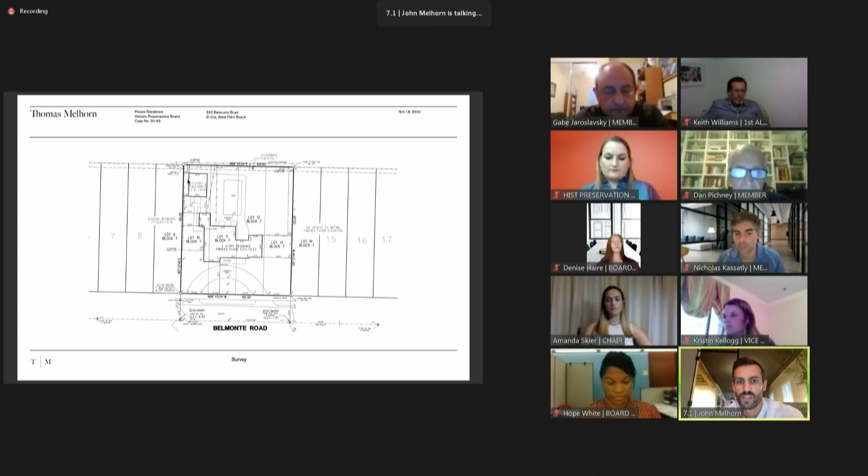This project is an ad valorem application. It is a renovation to an existing Monterey style structure on Belmonte Road. This is an existing survey of the lot. It shows the existing home, the pool in the backyard, which has actually been demolished, and then a non-contributing one-story accessory structure in the back.

This is the front facade. You can see here the brick first floor story, and then the second floor is wood clad and has a very low, slope pitched asphalt shake roof. This would be moving around to the right, so this is the east facade, and you can see a picture of the back and the accessory structure. And this is the rear of the house.

So here's the main house. The accessory structure would be off to the side, not pictured. And this is a laundry room addition that we'll talk about. Continuing moving around this house is the west facade. This is that laundry room addition. This is a side door, and then you can kind of see a bit of the street there. And this is a photograph of the accessory structure.

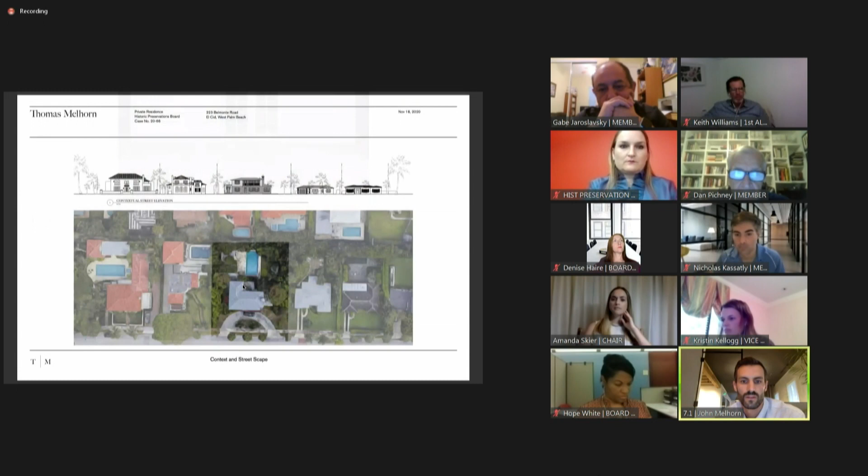This is the streetscape and context plan, so it shows how the house fits into the neighborhood. You may have seen on the survey, it's multiple parcels put together, so it's a rather nice sized lot. But this specific context zoning regulation for this area is rather restrictive compared to some other areas, which is nice. It's going to keep the openness of this lot, which is really part of the character of the street particularly. You can see as it moves from these low one-story ranch homes, it steps up to a few taller Mediterranean-style houses as you get closer to Olive.

This is the proposed plan that we have here. We are proposing to eliminate the circle drive in the front. I will say quickly, one of the things that Frederic mentioned is these both need to be 10 feet, and we have a landscape architect who will be providing a full plan addressing that. But for the most part, we are keeping the existing footprint of the main house, and the majority of the addition is happening at the rear of the house.

So we're adding on to the back here, as well as extending this a bit. And then we are removing the laundry room addition and adding a new laundry room that's up to grade with this. And then in the back, we'll be reconstructing this accessory building as a 2-story structure.

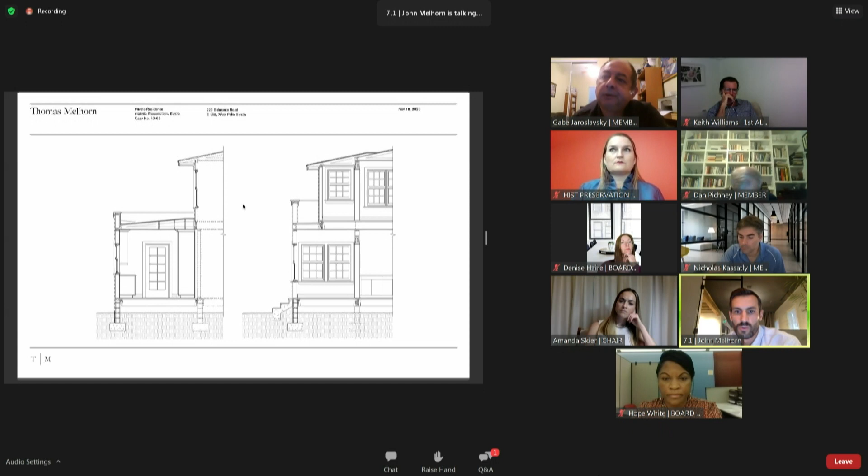One other thing I'll touch on from my consult with Frederica: she mentioned we had chosen to use windows that match the existing window type in our replacement on the sunroom, and recommended that we differentiate it. So this is an alternate proposal I wanted to have ready, using a casement type window instead of a double hung window.

And here's a colored rendering we put together as well. That concludes my presentation.

Okay, thank you. Questions of the applicant?

Yes, so you understand that there are 4 conditions for the approval of a project, right? Did you review them and agree with them, or not? I did, so I can run you through those.

Like I said, the first condition was the 10-foot maximum or 20-foot combined for the front entry drive. That's not a problem, we can address that.

This front window condition is the other one that Frederic had discussed, and this would be what I would put forward as our proposal. The third condition was that we keep the existing windows on this front facade, which I don't think we have a problem with at this time. So we'll restore those windows.

And then the fourth condition was that she had asked that we think about moving this door to the west facade instead of it being front facing. I also don't think that's a problem. If you'll humor me for a second, I'll go back up to the site plan and talk about that.

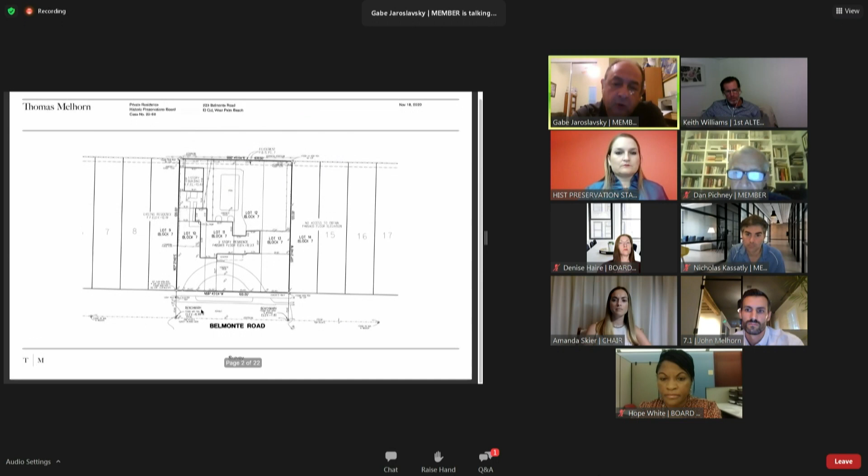Yes, so this second floor balcony — I mean, we'll be, I don't know — we would be saving this balcony, so the extent to which it projects out, the size, the members, everything we would restore or save, best we can. The lower balcony comes out, and we would be adding projecting outlookers underneath of this.

So the brick stays, the shutters stay, we'd be painting a different color. The elements coming off would be the deck, the steps, these 4 post columns, and also this door surround, because we won't be able to get the outlookers we want here without that. But the roof lines stay, and all that — the exterior walls remain where they are.

Any further questions of the applicant? I have a couple questions. The front door — I know it's not very Monterey to have that type of detail or pediment above it, but maybe moving the door off the laundry room area to the side will help. It seemed a little nondescript for the front of the house. I'm not sure if there's something.

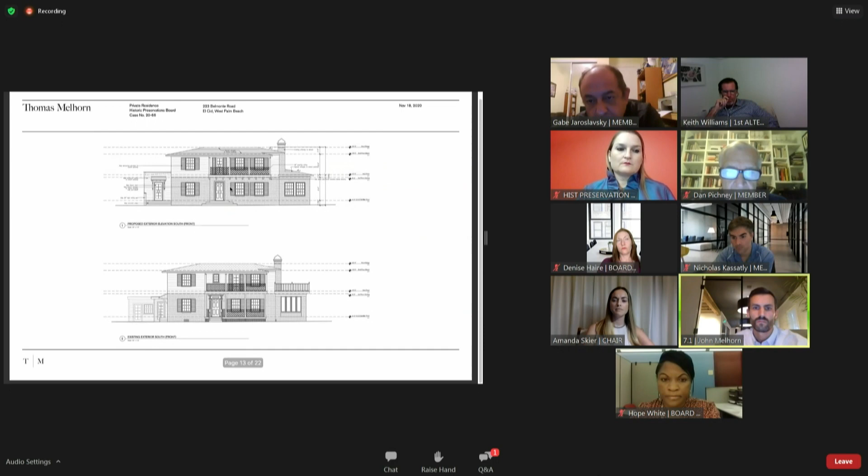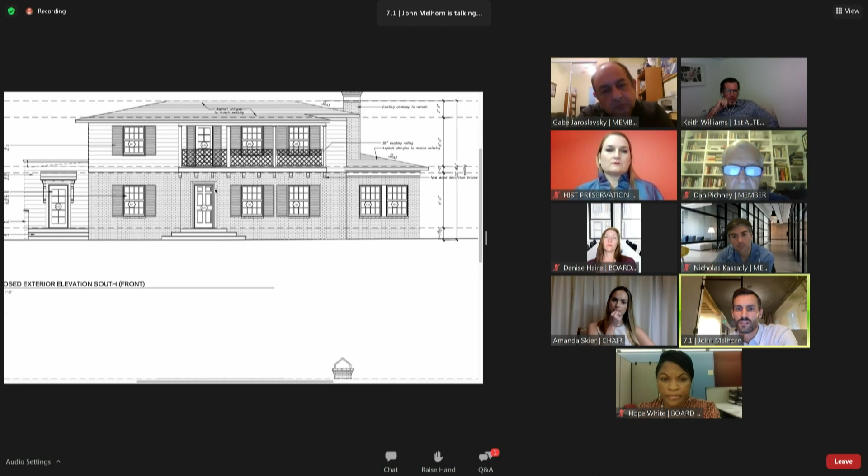Yeah, go to the elevations here. We would like to — so you can see the difference here, right? This is the existing porch with — you're right, Keith, we keyed in on that as well. This is definitely more of a federal colonial treatment than you'd see on a Monterey. Maybe we can look at this detail a bit more, but we'd certainly like it to be some kind of profiled stucco surround that accentuates it. I think that simple detailing is something you see in the Monterey style. Yeah, I see it here, I just didn't see it in the rendering, but I see it there.

And then you guys chose not to wrap the back of the house in brick, just run the clapboard all the way down? Yeah, so again I'll spin around the back here. Part of the reason is because this is the original, and since we're moving north we're coming outboard of that. We wanted to differentiate the fact that this was a new addition versus trying to completely conceal it or match it too closely.

Got it, and I'm sorry, one more thing — did you talk about the roof and the material? We're going to come back with the asphalt shake, like what's there now.

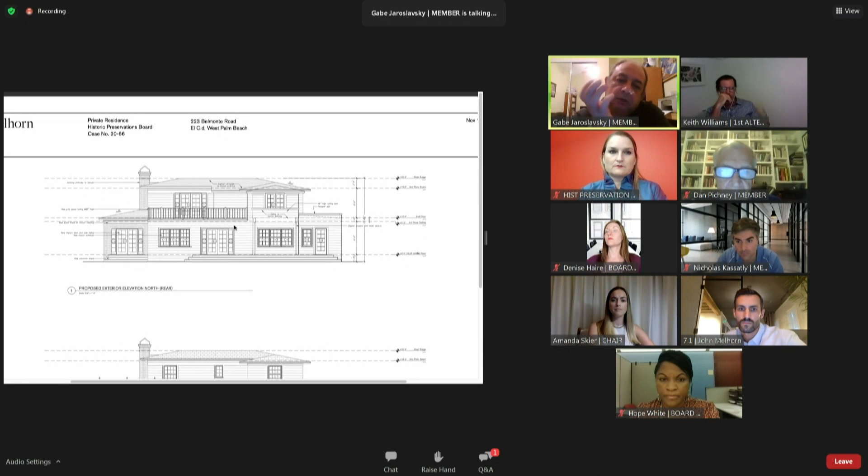Thank you. One more question. Can you explain why the decision, besides the fact that I understand that the master bedroom has the door now on the north side, but why changing the location of the terrace, if the terrace was original to the house?

Are you talking about the front? I'm sorry, the down below. So if you go to, so you see the terrace on the left, on the right, the terrace on the right hand side. Yeah, no, I know. Oh, on this one. Yeah.

I didn't see a lot of examples of that kind of rail. I would say it was truly made on an aesthetic choice. It wasn't anything that I had a historical precedent for. I wish I had some other pictures of the houses on this street, because all of them kind of have that low pitched roof. For the lower elements, you have the main body of the house, and then you have the wings, and they all have these lower pitched roofs. And I had not seen any examples either locally or through precedent that had something like that.

Okay, thank you. Any further questions of the applicant? Yes, I have a question.

The brackets underneath the second floor balcony, are those decorative or are they load bearing? Both. They're both. I can zoom in on it for you. I only say decorative because they will be like a profiled outlooker, and they're large. I think they're actually 5x9, so they're quite substantial.

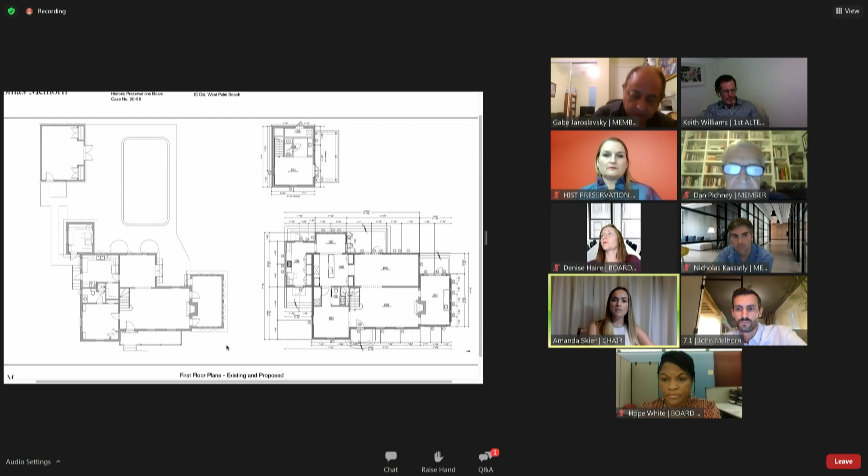Any further questions of the applicant? Mr. Melhorn, I have some concerns about that door surround. You've studied the other houses on the street. Yeah, we looked at them. So 210 Belmont has a very similar door surround, and the outriggers are actually touching the top of it. That leads me to believe that this is likely an original feature, and it is a form of colonial style architecture. So I think that while it may be perhaps more ornate than what might be seen on other Montereys, the fact that there's a home directly across the street that was likely developed at the very same time has a very similar feature gives me pause about the removal of that feature.

Yeah, I don't disagree with you. I know exactly the house you're talking about. It's kind of a yellow colored house with the black shutters. I spoke to Frederick about it as well in our consult, that I was aware that could potentially be an issue. I don't have a problem necessarily with looking at it and modifying it and seeing if we can reuse it.

Okay, so you would be amenable if that was a condition of approval? Yeah, I'd like it. Is it possibly something that I can leave up to Frederick as a staff approval, staff review type thing, instead of it being wholly redesigned? I would just like the opportunity to study that a little bit more in depth. In what way? Redesigning it rather than retaining the original, or what do you mean by that?

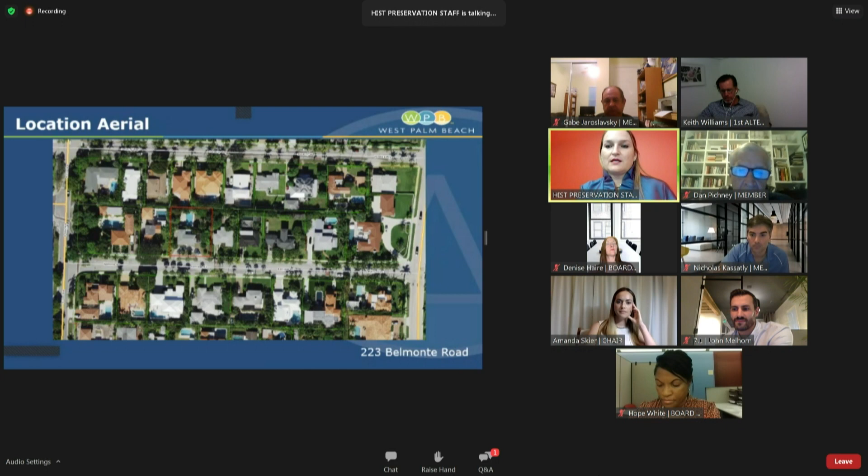Yep, great. So Frederick Mittner presenting also for 223 Belmonte Road. As was noted, it is a contributing structure in the El Cid Historic District on the north side of Belmont, between South Olive Avenue and Flagler Drive. It was built in 1940 by Burnup and Sims.

This is a current photo of the house, zoomed in specifically looking at the detail of the door surround that was just mentioned. That was something we discussed on the phone, and the applicant was going to see if they could find evidence whether it existed or not. One suggestion is perhaps this component could be lowered a bit to still retain the side elements, just a suggestion as the board explores how to address the surround with the applicant.

This is the context of the house, and Belmont in general has a lot of Monterey styles. The request this evening is for two parts: the accessory structure, which is the demolition of the existing one-story accessory in the northwest corner, and construction of an approximately 837 square foot two-story structure in more or less the same location, meeting the required setbacks of 5 feet off the rear and 5 feet off the side.

For the primary structure, there is going to be some selective demolition of the rear kitchen, dining, and laundry room, and demolition of the front porch. I have also been told by residents of the neighborhood that it had just a cantilevered balcony in the traditional Monterey style, not the porch we see now.

At one point I did have access to a photo. Unfortunately I could not locate that again, but I have seen an image where it was just the balcony.

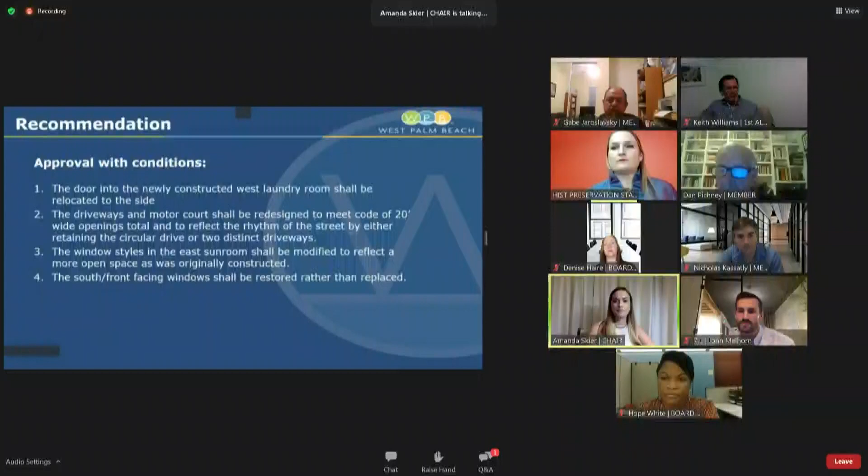Mr. Mittner? Yes, I have two questions. First of all, because there's a demolition, will that require two motions? For an accessory structure, we traditionally have not done that as a separate motion. Okay, but I'll leave that to the board attorney.

Okay, and secondly, the conditions called for the preservation, or restoration, of the windows on the south-facing portion of the structure. That packet you sent us had a listing of the conditions of all the windows, and they recommended, if I recall correctly, that all of them be replaced. Yet with the photographs I saw, there didn't seem to be significant damage to the windows. There were places where the paint was peeling, I guess due to condensation collecting below the muntins and so forth. So my question is, did you find any reason to preserve any of the other windows on the other sides of the house?

Well, of course, it would always be ideal that all windows are preserved. However, the policy the board has adopted and staff has been working with is that we restore front-facing windows where they're visible from the public right of way. We felt that was a good compromise where you get the impact protection and some of the other possible benefits of a new window in terms of insulation and noise. But again, it's not visible from the street, so we thought this was an appropriate compromise.

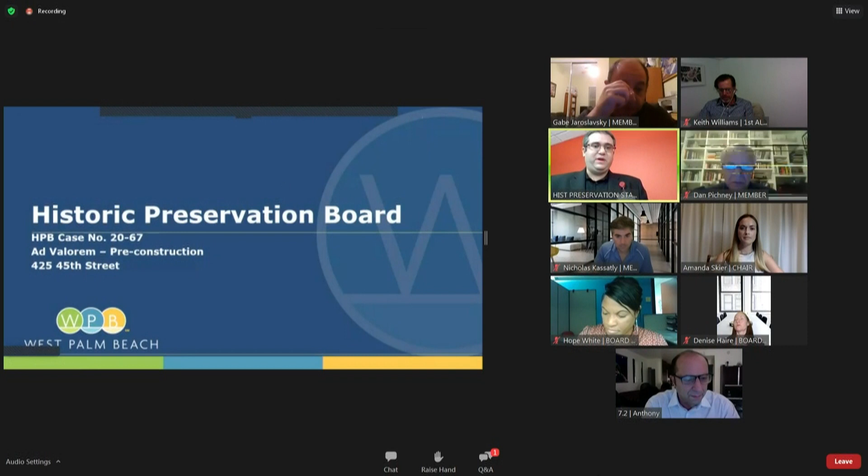All right, Aaron Borgover, Historic Preservation Planner. Here is case number 20-67 for an Ad Valorem pre-construction application for 425 45th Street. Here we have the location highlighted in red right here. There is a proposed about 421 square foot addition to the rear of the existing 946 square foot house, replacing all existing windows and doors with impact to match existing. Replace the existing garage door with an impact garage door with an increased height of 18 inches. And interior site work. 425 45th Street is a contributing structure within the Northwood Harbor Historic District.

On the left, we have the property immediately to the west, and on the right, we have the property immediately to the east. This is a photo of the property in question from the street. And here's just a close-up photo of the front elevation, including the garage door that currently exists, as well as the wood windows that are on the front elevation.

So a bit of the site history. Permit was actually pulled in 1939 and was granted for Marian Warr for $3,000. In the middle here, we have the Sanborn map, which was republished in 1952, illustrating the footprint of the house, as well as what is currently the garage. And on the right, we have the property record card from 1962, which illustrates the garage, as well as the property's current configuration as footprints.

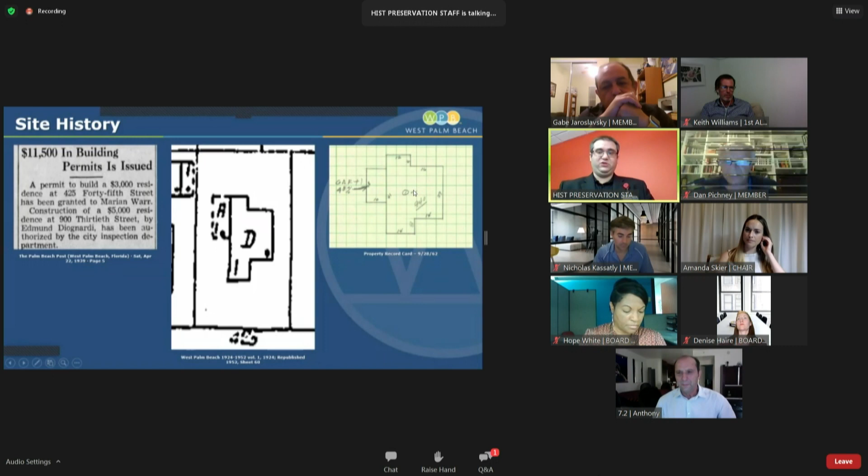Here we have the survey and the site plan on the right, and the addition is in the rear of the property. Here we have the existing floor plan on the left, and on the right the proposed floor plan, which has the master suite and dining room. This is the proposed elevation for the north elevation.

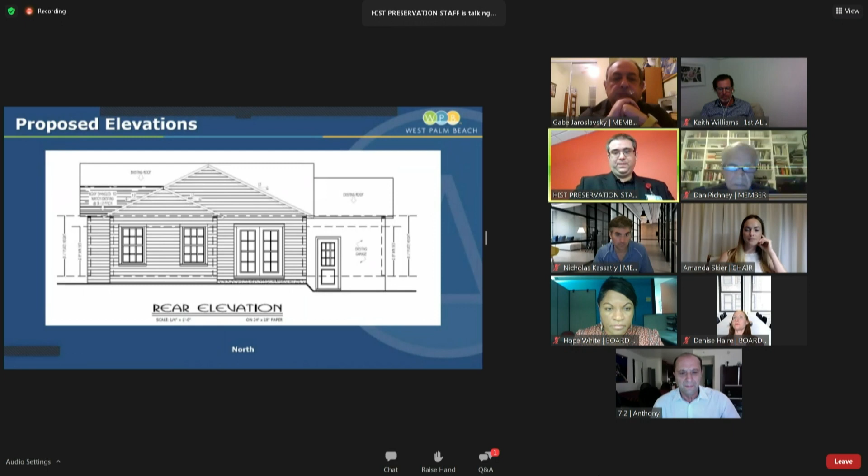So there's a paired French door, 2 6/6 windows. There will be a double face on the gable. And here we have the east elevation, which will have a 6/6 window as well as the gable that extends north, as well as siding to match the existing.

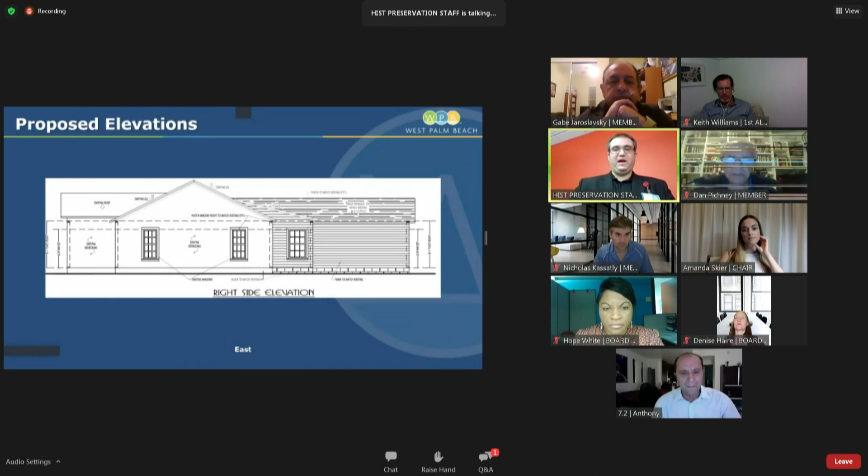So staff has reviewed the criteria for additions and alterations, and it complies with the Historic Preservation Ordinance as well as the Secretary of Interior Standards number 9 and 10. And staff is recommending approval of the pre-construction application with these 5 conditions.

The front street-facing window plus the window immediately adjacent to the front door shall be retained and restored. However, if the applicant can provide at least 2 letters from a licensed restoration company stating that the existing front windows are damaged beyond repair, staff can review and authorize the replacement of these windows with similar windows for the rest of the project. Second, all windows shall be sized to fit the original window opening frame and match the placement/depth of the original windows within the frame opening.

Third, the existing wood sashes shall be recycled, donated, or stored on site to preserve an irreplaceable historic resource. Fourth, all non-street facing glass shall have clear glass only or clear glass with low E coating, and all street facing glass shall have clear glass only. Lastly, the fifth condition, siding on the addition shall match the existing siding and material or shall be HardieBoard, Boral, TruExterior, or other similar product. Thank you.

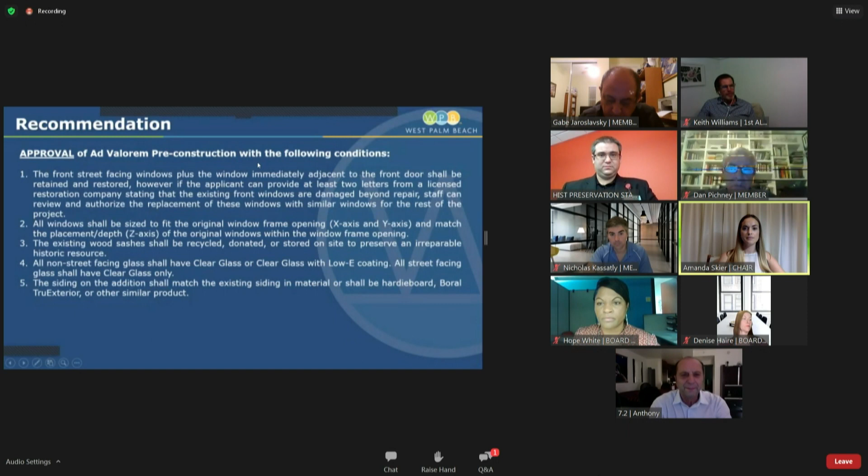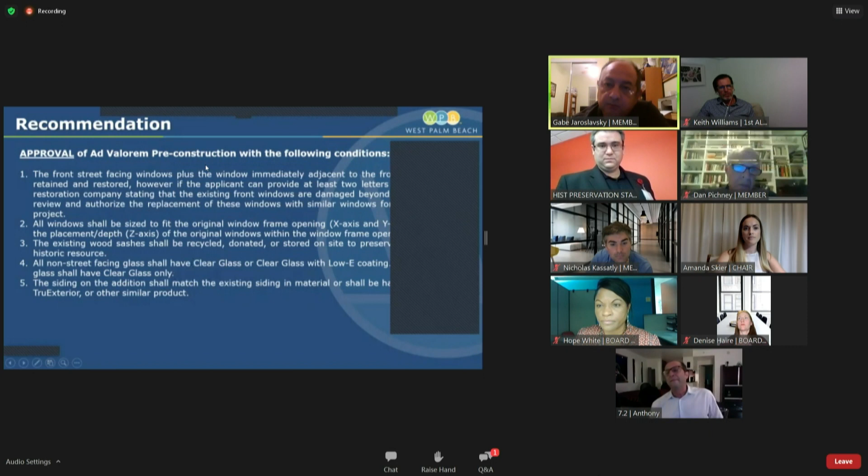I was wondering, Aaron, if you can go to the floor plan for the addition. I'm not really sure because probably what I was going to propose doesn't make any sense at this location and may change the design of the roof. But should we break the addition with the existing exterior wall? So because they are adding to the existing wall, should we break it there to differentiate what is existing with what is new? That is one way of taking this approach.

However, they could use a different material such as Boral TruExterior, or hardieboard and accomplish the differentiation with a different material on the outside, which they did. The application doesn't specify the material. It does say match existing, but it wasn't clear if that was for material or profile.

Okay, thank you. You're welcome. Any further questions of staff? Do we have any public comment on this case? I did not receive any. Madam Chair, there's no one indicating public comment, no. Okay, we'll go into executive session then.

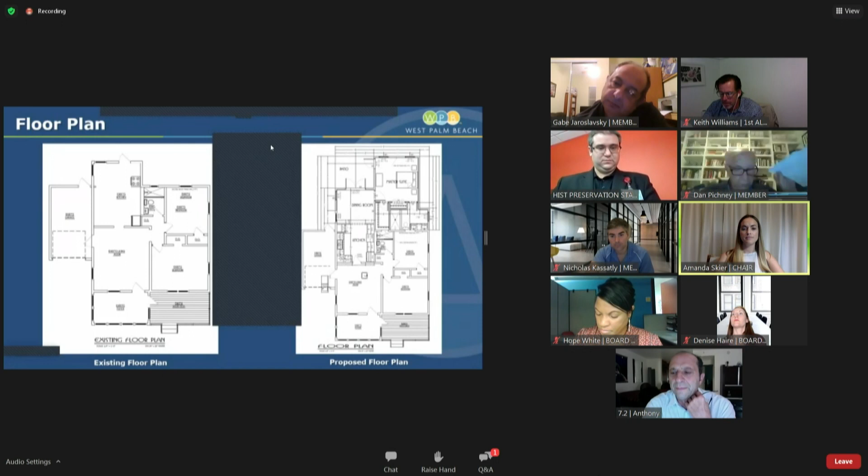It seems that the owner is amenable to the conditions. It will certainly help adapt the property for a more modern lifestyle. I agree. Unless there's any further discussion, would someone like to make a motion?

I can make a motion. I move that the Historic Preservation Board approve application number 20-67 for ad valorem pre-construction in accordance with standards 9 and 10 as set forth in section 94-49 of the City Zoning and Land Development Regulations. The motion is based on the testimony presented along with the application submitted and the staff report, which constitute competent substantial evidence. In addition, the approval of this request is made conditional upon the following restrictions, stipulations, and/or safeguards that I move are necessary to ensure compliance with the purpose and intent of the Historic Preservation Ordinance, the historic preservation element of the comprehensive plan of the City of West Palm Beach, the Secretary of the Interior standards for rehabilitation, specifically standards 9 and 10.

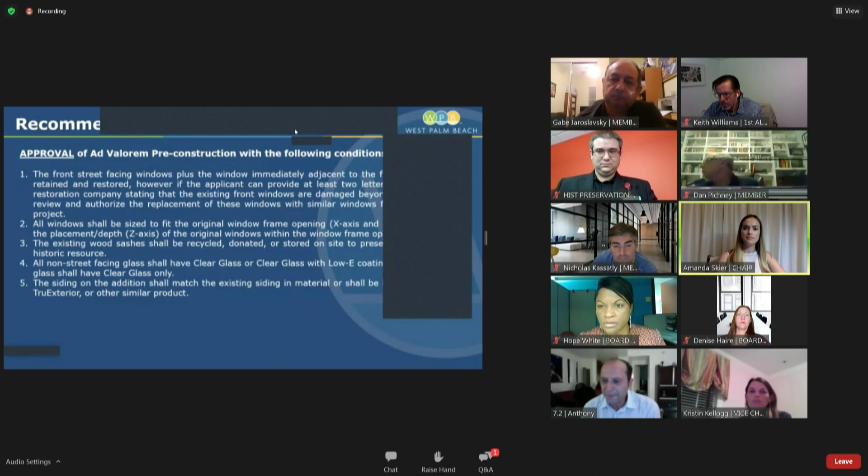Do we have a second? Second. All those in favor? Aye. Aye. Any opposed? Okay, motion carries. Your project is approved. Thank you. Thank you. Appreciate it. Thank you for the staff too.

Moving on to case number 20-70, 3320 Washington Road. I think Chuck Millar has a presentation for that.

Chuck, you'll just need to turn on video and audio. Yep, I'm good. Can you hear me? We cannot see you, give me one second and I'll fix that. How's that? Great. Raise your right hand. Do you solemnly swear that the testimony you're about to give will be truthful? I do. Are you presenting, Mr. Kolins? We can't hear you, you're on mute. Oh, Mr. Millar will begin the presentation and I'll be here maybe to add a few words. Okay, could you raise your right hand please? I did. Go ahead, solemnly swear or affirm that the testimony you're about to give will be truthful. I do. Thank you.

Okay, please proceed with your presentation. Is it visual? Yes. All right, great. Thank you, I appreciate the opportunity to be here tonight. With myself and Ron, I've worked closely with staff. We appreciate the time and effort that they've put into this, as well as the board and all the other applications, especially ours. This is a request for 3320 Washington Road by the Curry family.

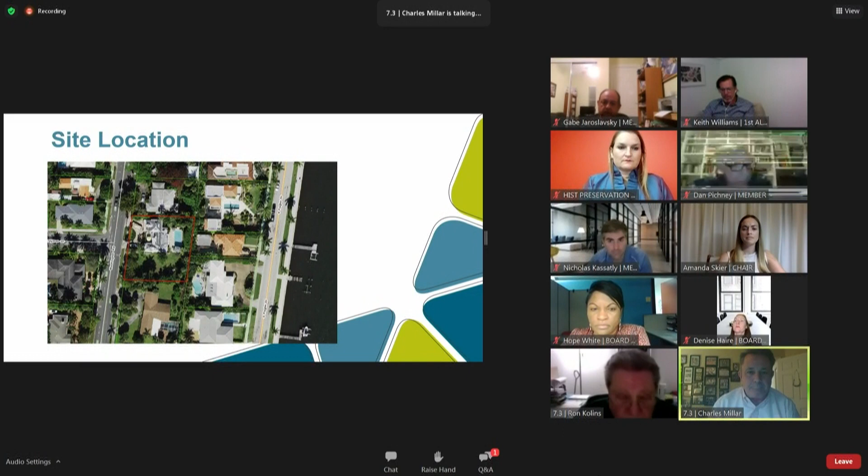This gives you a higher elevation aerial of the neighborhood and surrounding lots. I won't point them all out, but you can see visually that there are numerous lots throughout the neighborhood. What I've picked up here is essentially 4 blocks that have a 50-foot lot frontage based on the plat from 1924.

Again, it's a request for relief from section 9482, asking for 5 feet on the north, which is the minimum. There'll be 10 feet on the south, and a cumulative requirement of 20, so we're seeking a relief of 5 feet.

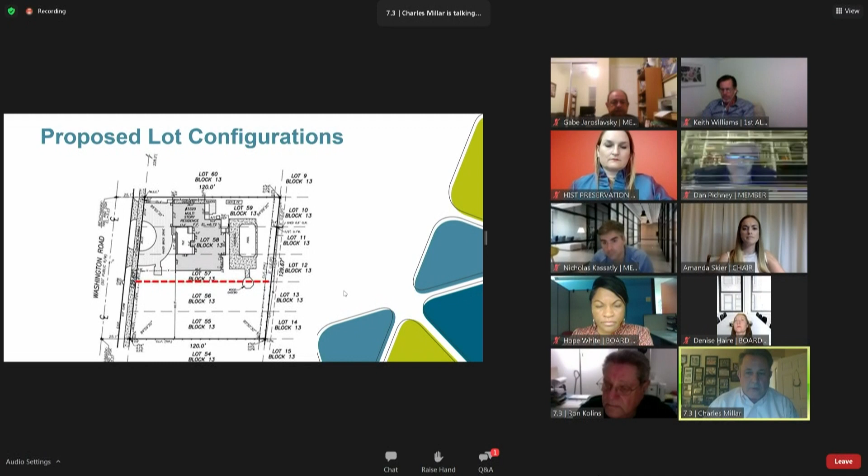So the south portion is approximately 10 feet, and the north portion is approximately 5 feet. So when this lot is created for future purposes, we need a waiver of 5 feet for the Curry property. The 2 lots combined on the south side will have to come in and comply with all minimum standards in the zoning district.

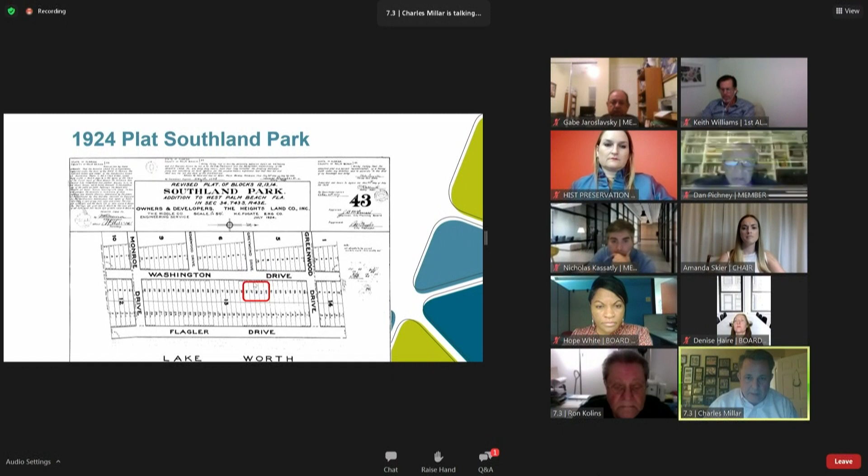A little bit of a street view. This is standing in the Curry property looking to the northeast, and this is looking directly to the east from Washington Road at the Curry property. The subject site is really behind the hedgerow.

I'm not going to read through these because we do have a staff recommendation of approval, but I did, at least for the record, want to establish compliance with the variance standards, which we meet all 10 of. I'm not going to read through these and take up your evening.

In summary and conclusion, the 5-foot variance is justified. It maintains the residential and historic preservation character of the neighborhood. It meets the intent and purpose of the zoning district by meeting the minimum 5-foot setback. The lot split will follow lot lines as platted from 1924. The massing and rhythm of the existing residential streetscape will continue to be maintained and preserved.

This fulfills and complies with the goals, policies, and objectives of the city's comprehensive plan. The application is similar in nature to like variance requests which have been granted throughout the neighborhood in the past. It allows for the reasonable and sensible use of both lots, complies with the residential development patterns within the existing neighborhood, and is a value-added residential improvement to the neighborhood. We do have staff's recommendation of approval.

We would urge the board to approve our request. We're here to answer any questions. Thanks to staff, and I will allow Frederique to make her presentation. So thank you.

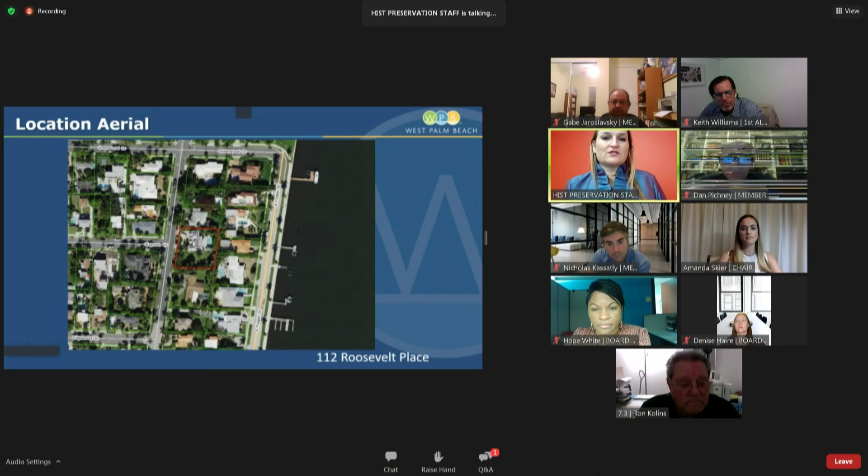A quick overview, similar to what you just saw presented. The cumulative side setback variance request under case 20-70 for 3320 Washington Road. The subject property is on the east side, located in the Prospect Park / Southland Park Historic District. The request is for a 5-foot cumulative side setback. 20 feet is required; they're proposing approximately 15 feet, 5 on one side, 10 on the other. They just don't add up to the 20 adopted under our building size, scale, and mass regulations.

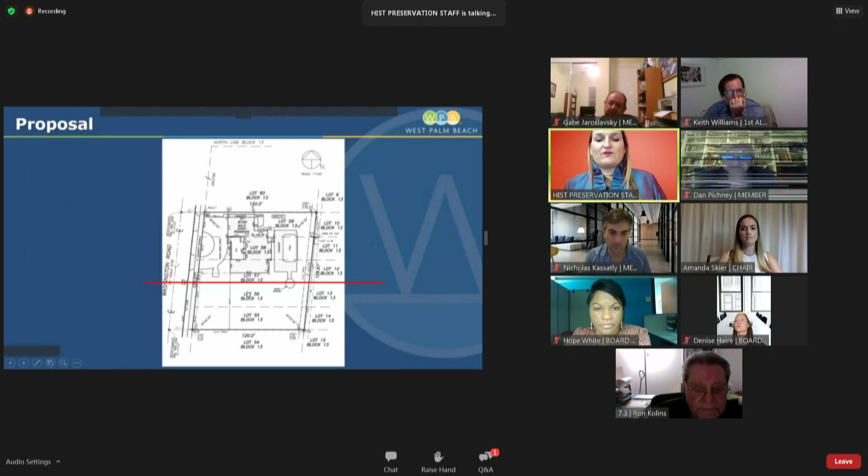As they've already indicated, it would be right along an original lot line, putting lots 55 and 56 together, and the existing structure would remain on lots 57, 58, and 59. This is how that translates into the aerial.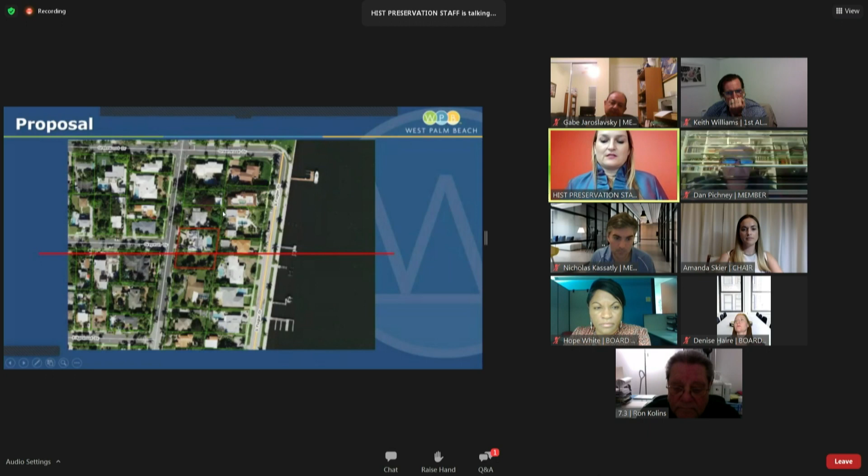The southern lot that would be created, currently vacant, has about 52 feet of frontage, similar to other lots in this area, including a few over on South Flagler Drive and Washington Road, and certainly a lot on the interior streets. This is the house that's currently there, and as you saw in the previous image, the vacant portion is behind this hedge.

Any new construction proposed in the future on this lot would of course require Historic Preservation Board approval. So again, another shot from the south, the neighboring property, and this would be a staff administrative lot split because it is on original platted lots.

So we are recommending approval because we do believe the petition meets the 10 variance standards found in section 94-38D6. These are included in your staff report, as well as have been covered by the applicant. We do believe it complies with all of these. I'm happy to answer any questions you may have.

Okay, thank you. Questions of staff?

Seems pretty straightforward. Do we have any public comment on this case? I did receive a few phone calls asking what the case was about, but did not have any additional feedback in the affirmative or negative, just curiosity. Madam Chair, there is no one online who has expressed a wish to comment.

Okay, thank you. So we'll go into executive session. As I said, it's pretty straightforward and no one seemed to have any questions. So would someone like to make a motion?

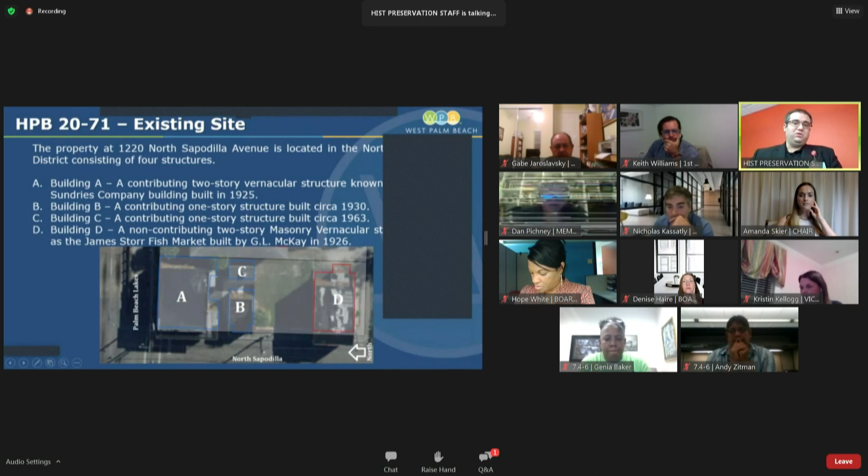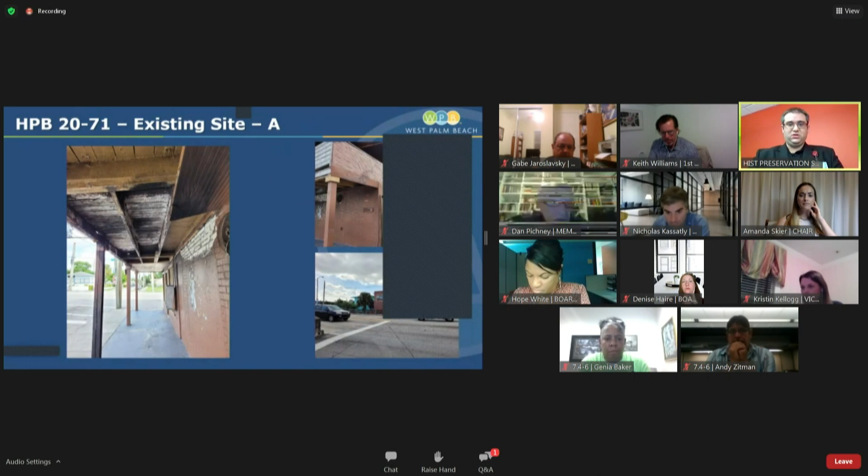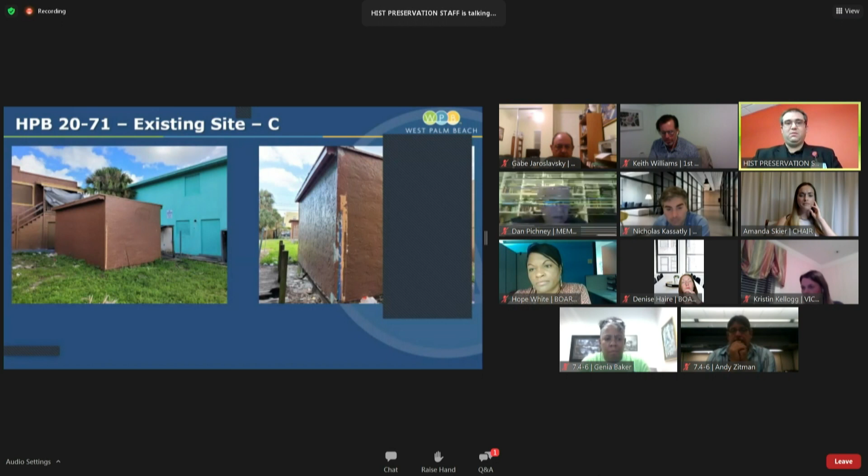The next few slides are just photos of the existing property. Here is building A, on the corner, illustrating its condition from the outside. Here is building B, the next street-facing building. Here is building C, located behind building B. And here is building D, on North Sapodilla, on the corner of the alley.

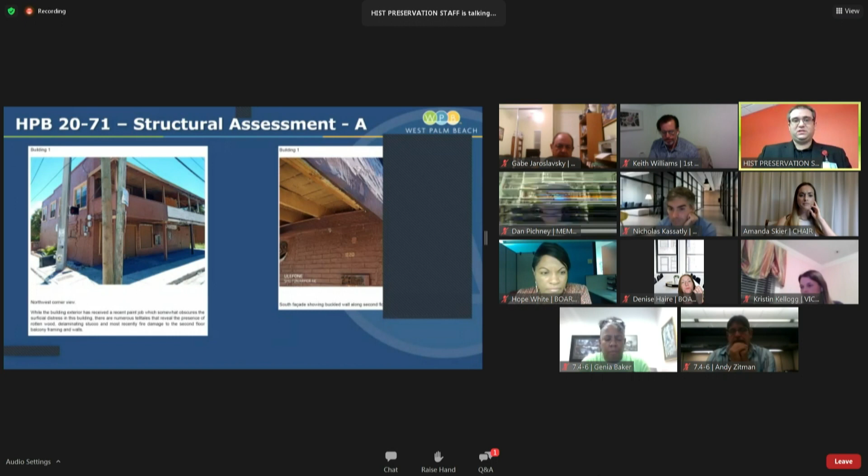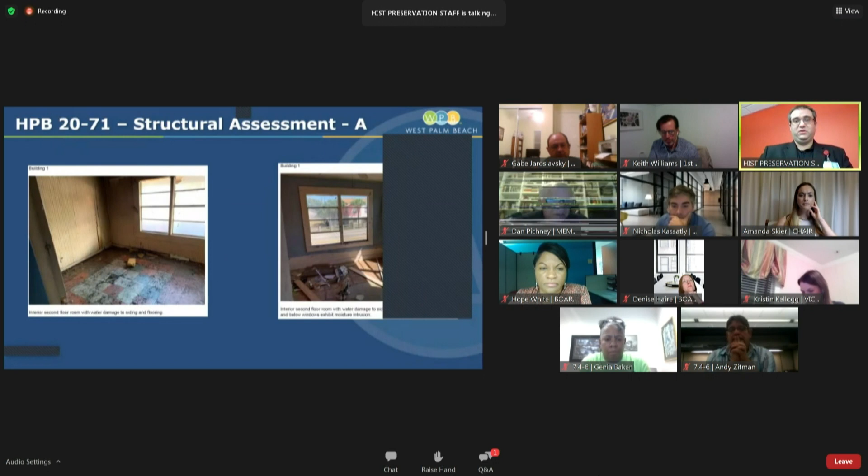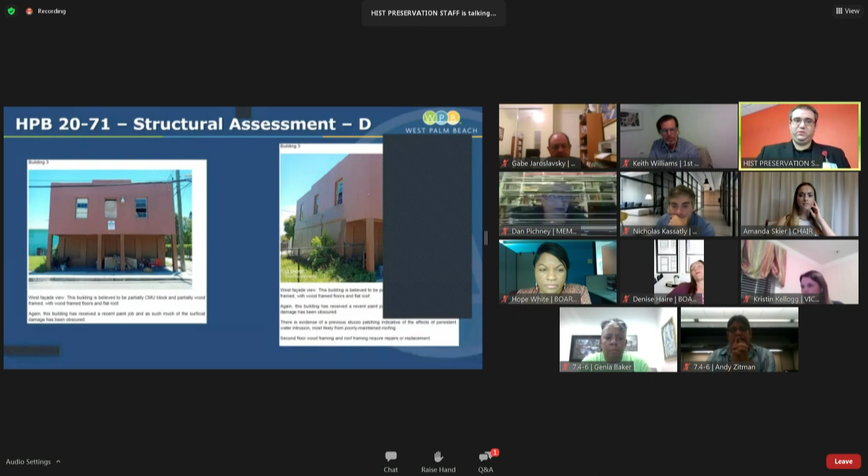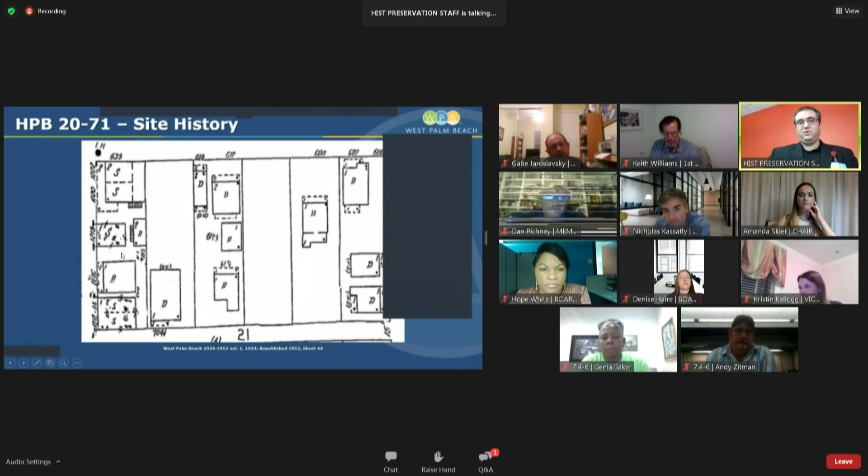A little about the site history here. This is the property in question. There was a number of buildings here, one of which has since been removed. Here is the property record card, which at one point listed a beauty salon, a barber shop, another beauty salon, as well as Pine Ridge Sundries.

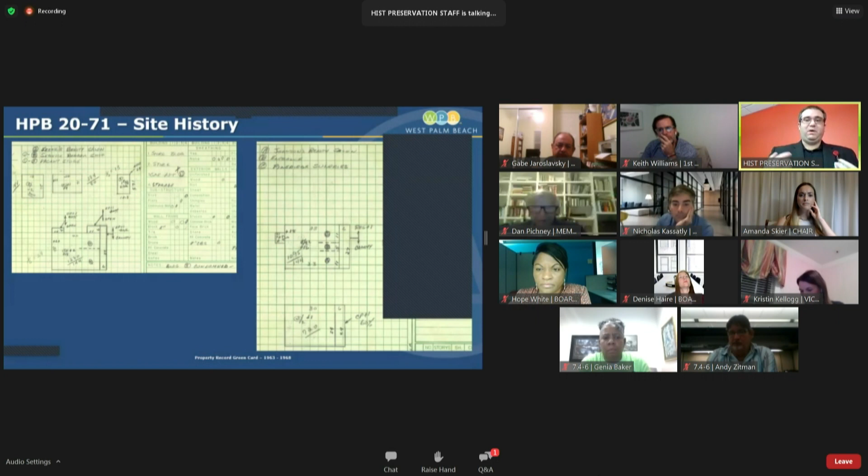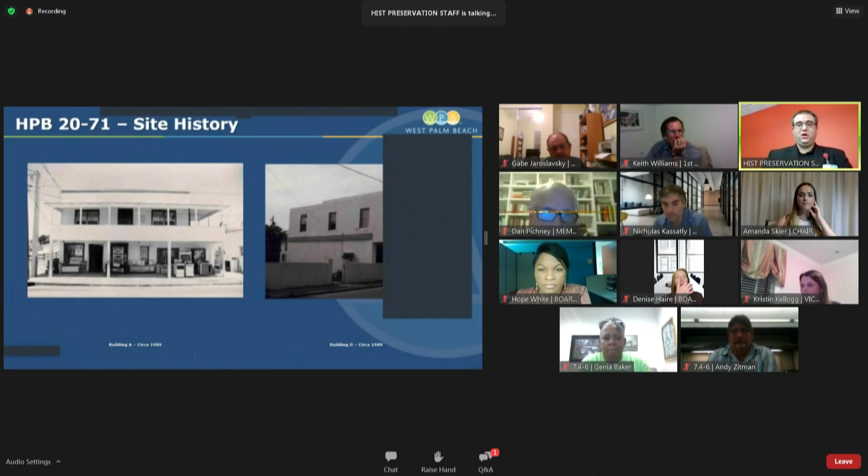A little bit about the individuals who owned this property at one point. This gentleman, S.M. Flewellen, either started or took over the business in the 1930s and ran it until he retired in 1971. When he retired, M.J. Adderley took over the business. I'm not sure when it closed down, didn't find that information, but Adderley worked at the store as a child, at age 9.

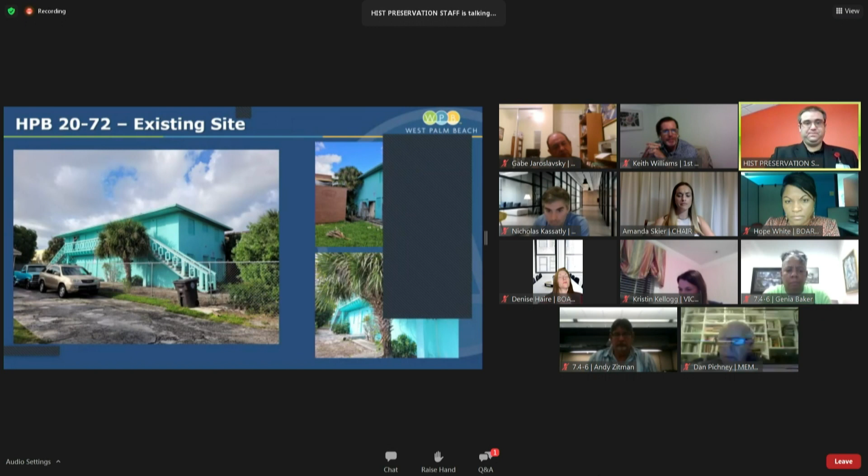Next is 2072, the demolition of a primary non-contributing two-story structure at 632 Palm Beach Lakes Boulevard. These are photos of the existing site from the exterior, illustrating the mid-century railing for the stairwell.

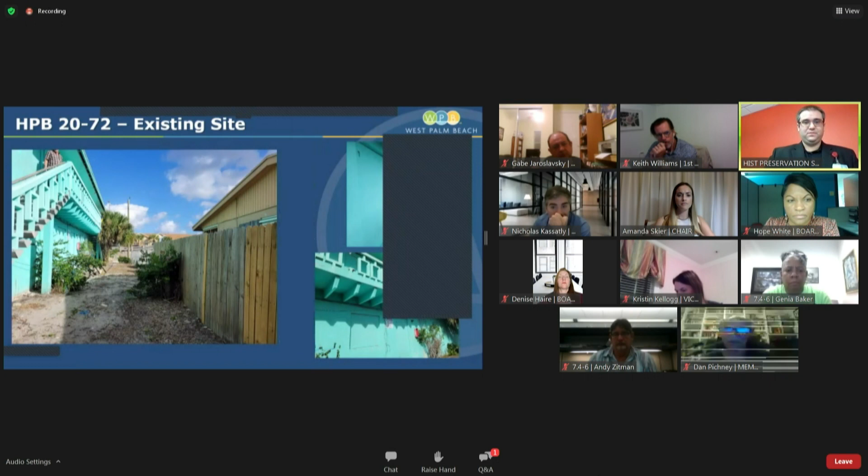A little bit about the site history here. Originally there was a one-story frame structure in the back that was demoed for parking. The contractor was Metzler and the architect was E.H. Gothenberg. On the right is a note from the property record card that the project was actually held up because of the 12th Street overpass when it was originally being built.

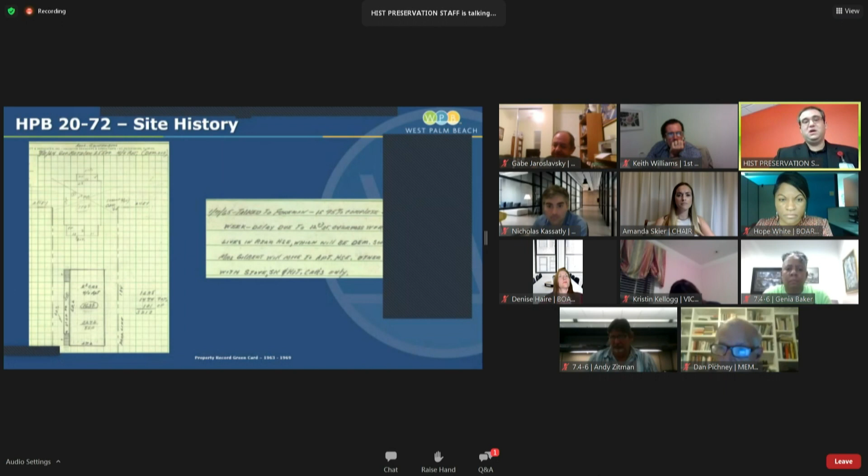A brief history about the architect: he was a native of Pennsylvania and a resident of Boynton Beach for 12 years, where he worked as the planning and inspection director. Unfortunately, after he passed away, there was a listing stating that if no one claimed the drawings, they would be destroyed, shown on the far right, in 1969.

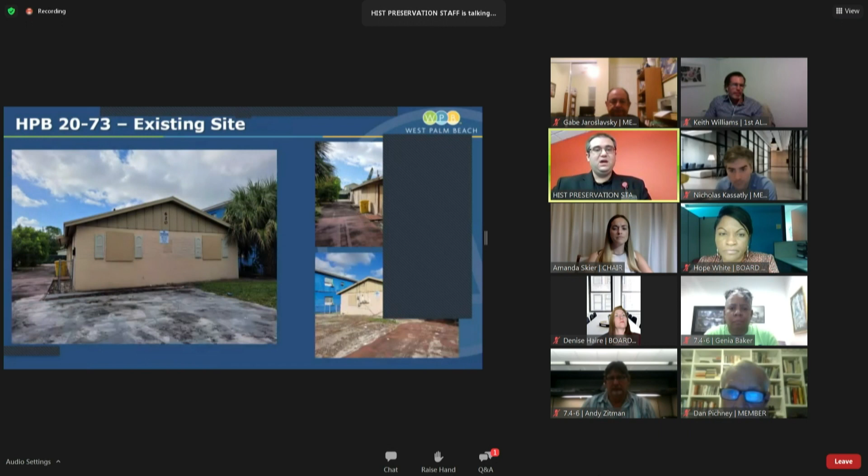The next request is 2073, for demolition of a primary non-contributing structure at 620 Palm Beach Lakes Boulevard. Here are photos of the existing site from the exterior. This is the property record card, and in 1963 it was built by Royal Contracting.

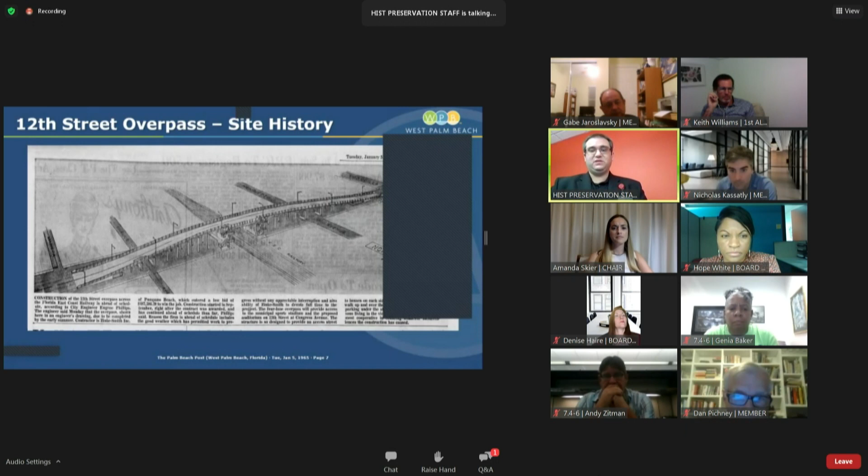A little bit about the 12th Street overpass. Here is a drawing from 1965 from the Palm Beach Post, along with a couple photos of the construction of the overpass. This one is from 1967, showing the overpass being completed, along with street marking and traffic light installation. The building on Sapodilla is located right here.

I actually received this yesterday from Palm Beach County. This is the updated project. In my staff report I spoke of a replacement, but it's actually a widening and repair. The image in the top left is option 1, widening to the north of the existing overpass. Option 2 is center widening, on both ends. Option 3 is widening to the south. If that is the case, there will be a maintenance easement, and 1220 North Sapodilla, which is already impacted by the overpass, will likely be further impacted.

This is just a summary of the key differentiators that go into the impact on the existing structure, as well as the right-of-way that would be required depending on the option. Center widening doesn't require any additional right-of-way. North and south widening does.

Staff has reviewed the criteria for demolition for case 20-71, the building on Sapodilla, the 4 structures. The applicant submitted a structural assessment report outlining the challenges of rehabbing the structure, along with calls for service at the property, included in your packet, which indicate a significant number of chronic nuisances that have the possibility to hinder the general welfare of the city and the Northwest Historic District.

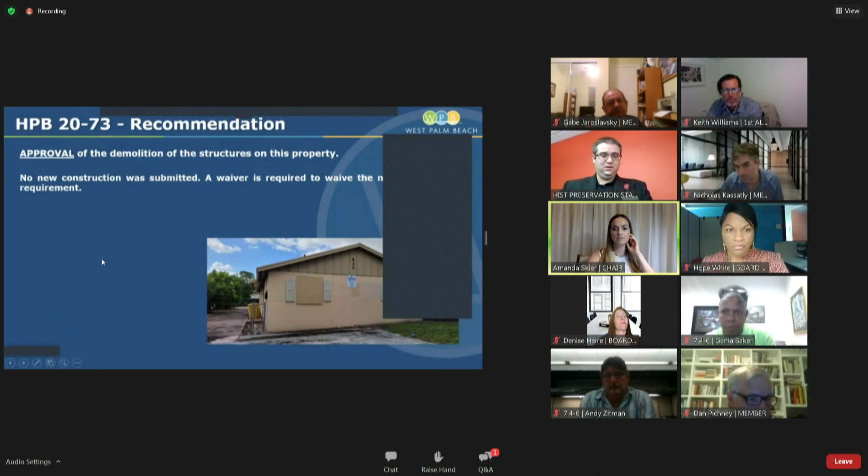So if I may. Yes, please, go ahead. Thank you, Madam Chair and members of the board. I'd like to offer rebuttal to each of the recommendations proffered by staff.

With respect to case 20-71, 1220 Sapodilla, the agency does concur with staff's condition, and we will provide a historical marker making notations of the previous occupants and uses of that building. With respect to case number 20-72, 632 Palm Beach Lakes Boulevard, the agency does not concur with staff's findings for denial, for the reasons stipulated in the previous case.

Specifically, as noted, the subject property is located adjacent to the Palm Beach Lakes Bridge, which is slated for redesign and reconstruction, a project led by Palm Beach County. The agency is participating in this effort because we'd like to drive the final design of this bridge reconstruction. As part of our participation, we are trying to acquire the properties immediately south and adjacent to the bridge to avoid a formal taking, or eminent domain process. The alternates mentioned will most likely involve widening the bridge to the south to accommodate both bike and pedestrian pathways. This will, of course, eliminate the frontage road illustrated in one of the photos.

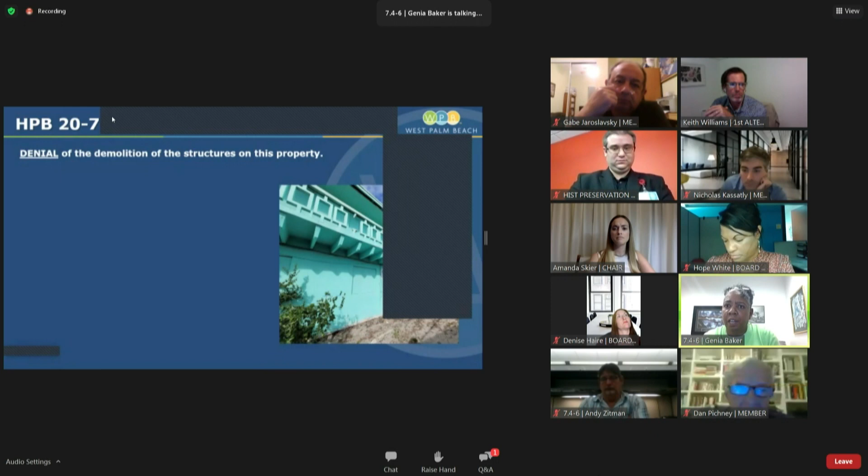So, if you would indulge me, I'd like to go ahead and address specifically the 7 conditions for consideration for demolition. The agency offers the following: first, this resource is a non-contributing structure, and it is not designated, nor is it significant in our opinion to the district. Moreover, maintaining this resource for the purpose of retaining a staircase railing, in our view, is not a justifiable use of public funds in perpetuity.

The resource itself is not listed on the National Register. This resource is not one of the last remaining examples in the neighborhood. There are similar buildings located at the corner of 3rd and Douglas, which was previously owned by a well-known family.

Called the Dysons. There's another structure at 7th and Division, which we now refer to as the Purple Building. If you've been in the neighborhood, you can't miss it. And there's another representation at 8th and Henrietta, which is across the street from the historic Sunset Lounge.

And I would be remiss if I didn't mention to you all that we are in the throes of a significant restoration, which is being totally funded by this agency. All of the buildings that I just mentioned are relatively well maintained and are representative in the neighborhood.

It's not practical to repair this resource because it would be the last building remaining on the tract of land adjacent to the bridge. The agency believes that a vacant lot would be more suitable to be included in the master redevelopment of the surrounding area.

As demonstrated in the previous staff presentation, this property is also a source of numerous complaints and is a nuisance to the adjacent owner-occupied single-family home, which is a direct and ongoing hindrance to the general welfare of the immediate property owner and the surrounding neighborhood.

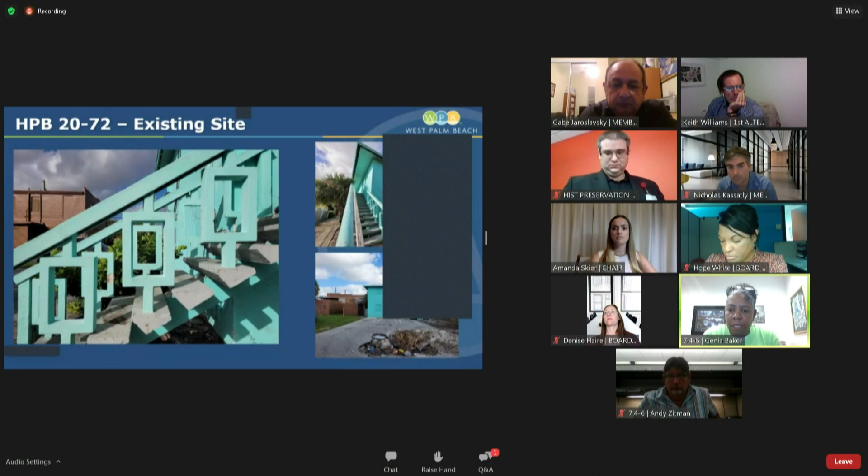Let me just add for the record, we are relocating two structures as we speak. One is at our, I believe it's 360 Gardenia Avenue. That's being relocated from Gardenia to 4th and Division Avenue. I believe it's referred to as a Potter building. Help me out with that, Aaron.

Another building that we're relocating here shortly is the Fern Street building that I referred to, and that's at the corner of Fern and Cordrill. That will be relocated to 7th and Tamarind Avenue, and it's going to be repurposed for a commercial construction office. So both of those are huge undertakings and they're quite expensive. The relocation is being funded by the developer. I think I'd be hard pressed to convince the CRA board to spend upwards of $250,000 to relocate this particular building.

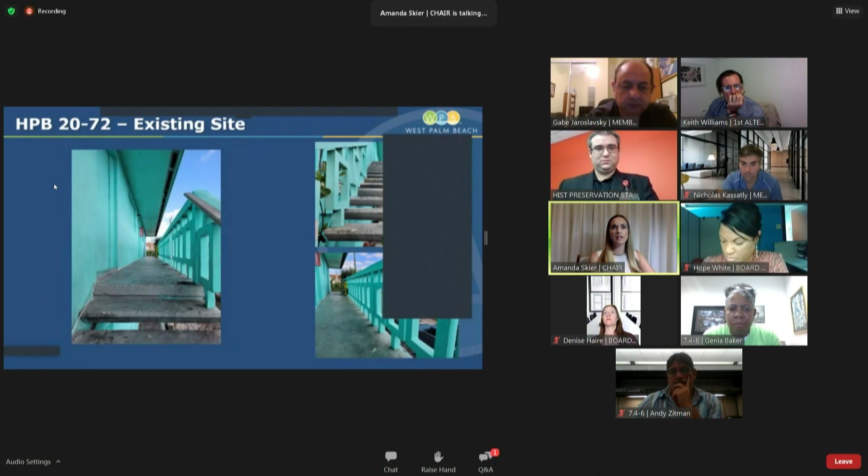I have a question for Mr. Borngraber. For the building on Sapodilla, your recommendation for approval, I guess, so you're recommending approval of that demolition, but not of this building. Is that based on the condition of the two buildings, or what is?

That recommendation is based on the fact that the building at 632 Palm Beach Lakes is made entirely of block, a much sturdier material. This building, for example, is wood frame, so deferred maintenance would have a greater impact on it.

Additionally, the overpass, when it was built in 1965, already impacted the property. If you walk down it, which probably very few do, it's probably 10 to 12 feet. So any further expansion, especially if widening to the south is the preferred approach, will impact the property even more, to the point where it might actually be right on it or right next to it at best.

For 632, it's further back. Therefore, unless there is a substantial expansion, which the current plans don't seem to indicate, that property will be minimally impacted, or the impact that already existed when it was built at the same time will just continue as is.

Isn't it normally the procedure that when we approve a demolition, we approve plans for new construction at the same time? Yes. So I guess the request is that this is being waived? Correct.

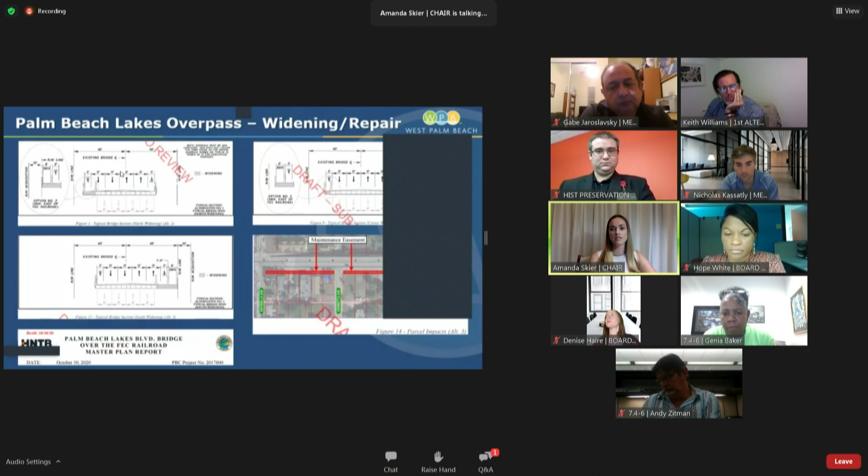I'm familiar with this historic district, and obviously it represents a very important part of West Palm Beach's history. So it gives me pause to see contributing buildings to the historic district being brought forth for demolition. Specifically, the Sundries building at the corner of Sapodilla has obviously been part of the community for a long time. And I know there are many vacant lots throughout this district.

Has there been any consideration to relocating this building, given that it is wood frame and that would not be as costly as a concrete block structure? I believe my colleague is on the line as well. Andy Zitman can probably speak to the potential relocation of that structure.

I would just admit, before I ask Andy to pipe in here, this building is in extreme disrepair. And I don't believe we have a site currently owned by the agency in a commercial district that would allow adaptive reuse to be reestablished in the building once relocated. It would be a significant undertaking to relocate the structure.

How long has the city owned this building? Less than a year, when did we close, Andy? I believe March. March of this year, that's correct. And that was not an easy feat either.

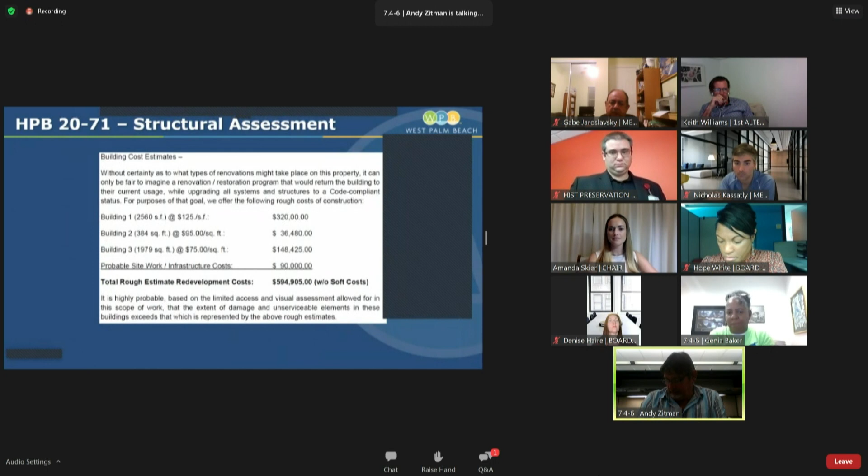The cost itself, there's a rough estimate for the redevelopment of the structure as it sits right now on its location, roughly $594,905 without soft cost. That is just to bring up the entire buildings 1, 2, and 3 up to standards of today's building code requirements.

That does not include the relocation if that's going to be addressed. The relocation will probably be another $100,000, if not more, because it doesn't have a crawl space underneath, and the wood structure itself is pretty badly corroded with termites, et cetera. So it will be a significant impact to lift up that building and move it to another location.

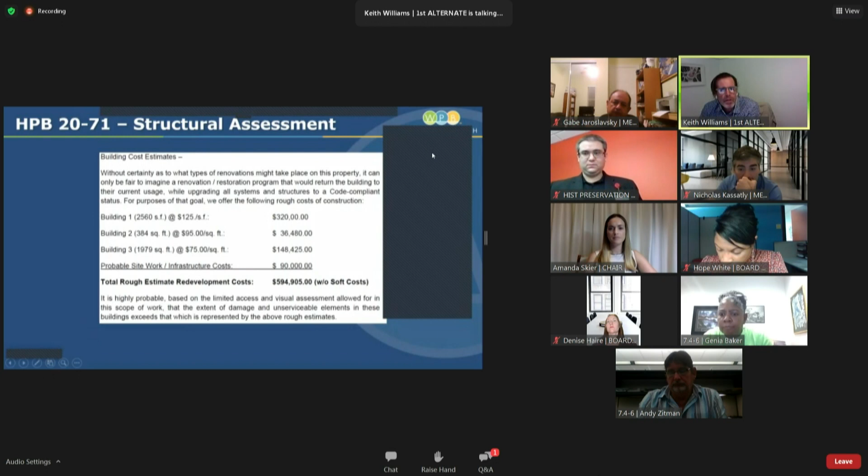Okay, thank you. You're welcome. I have a question for Ms. Baker. There's 2 properties in between these 3 buildings you're proposing, correct? What happens to those? So the one immediately adjacent to 632 is a single family owner-occupied home.

Frankly, we have been in conversations with the owner. The owner is very much tied to this property, she's lived there for some time now. We are trying to negotiate relocating her to a new home, either within the neighborhood or wherever she chooses, within reason. Certainly if this property was taken by eminent domain, it would be negotiated based on market value, and there would be no goodwill. So that's why the agency is trying to obtain these properties. Once we obtain that site, our intention is to remove it, to tear down that building.

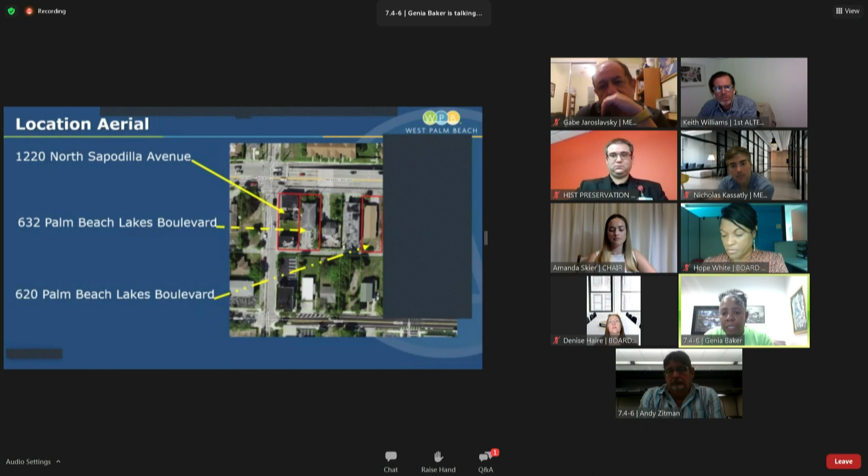The one adjacent to that, 620 Palm Beach Lakes, is a 2-story multifamily structure. We also have been in conversations with this property owner. Unfortunately, he thinks his building is worth $10 million, which is not the case. Hopefully we do not have to use eminent domain procedures to take the property, and we can arrive at a number that is representative of what the building is actually worth. So the intent would be to take that down as well, since we do not own those 2 structures.

And then there's, I'm sorry Aaron, there's a big block there, I can't see it. What's going on? There you go. Move going to the east, there's a building at the corner of this block. If you can move that over a little bit, Aaron, or no? Maybe, okay.

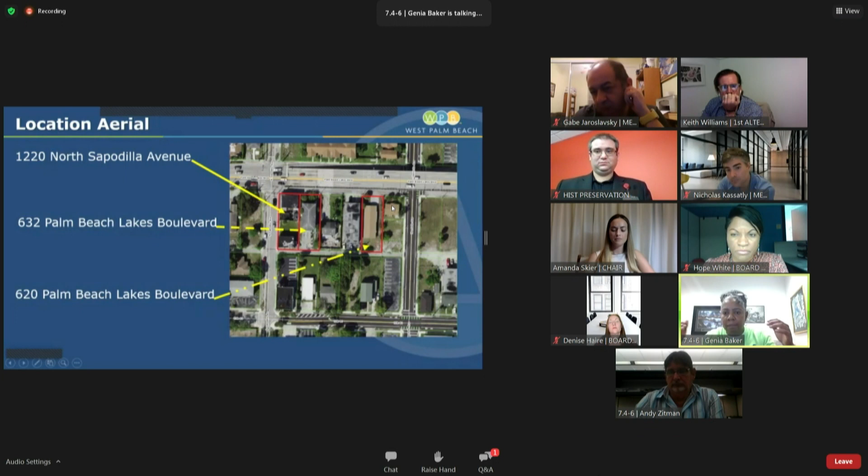Well, there's another building which is a rental unit, but there is access off of Henrietta Avenue to that building. We will also probably, we've been in conversations with that owner to purchase that property. So in effect, the intent is to clear out the entire tract, making room for the expansion to the south. And then we're in conversations for an overall redevelopment of that entire area.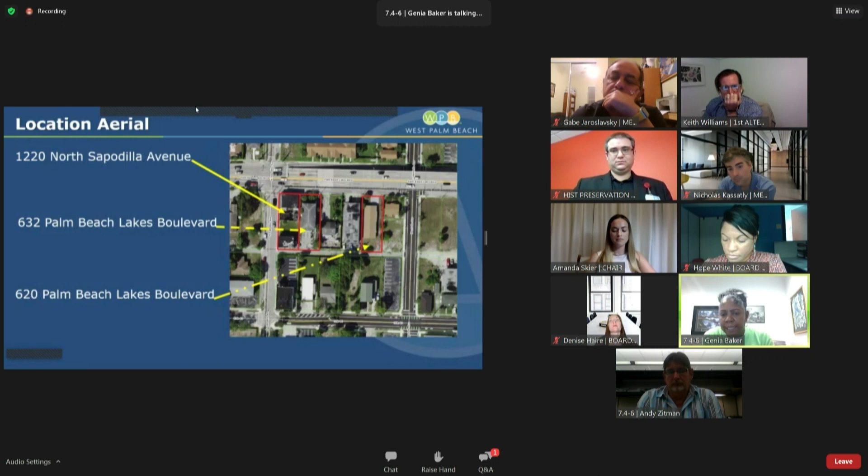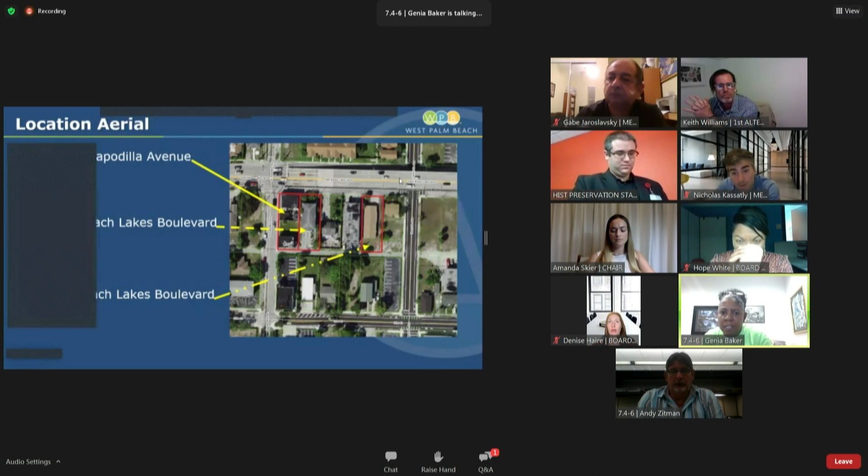I don't know if the massing study and master plan for the area, both north and south of the overpass or bridge, was included in your packet, but there are some very exciting ideas underway for reuse of that area, all the way back to 11th Street to the south. Got it, thank you. The concept development plan for the neighborhood was included in your packet, and that plan does take into consideration from Sapodilla Avenue east to Dixie Highway on the south side.

I'm not sure what page that was on. It is after the presentation regarding the Palm Beach Lakes Boulevard overpass replacement, which is a PowerPoint, and before the structural assessment. Okay, this is page 254 of the package of the PDF. Okay.

Do we have any further questions of staff or the applicant, Ms. Baker?

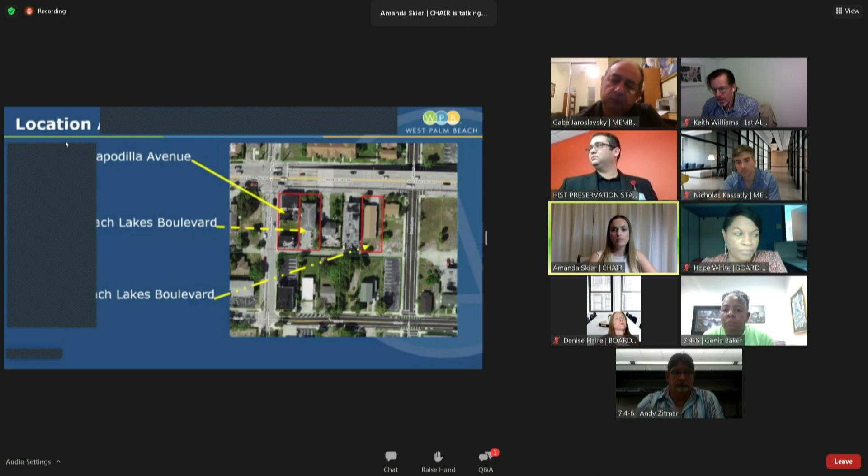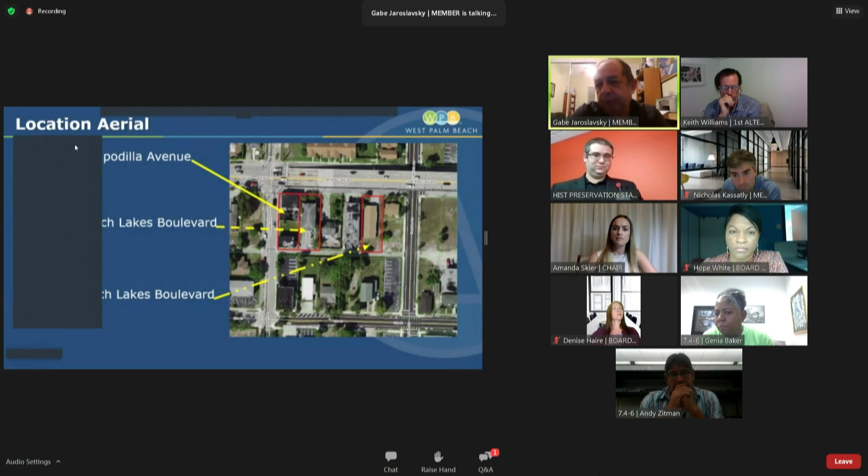I think we should ask what happens if we don't approve this today. What you were saying about the waiver, the fact that there's no new construction projects submitted, what will that do to the project? Is this something you can come back to at a later day, or do you need this approved this month because next month is too late? Can you give us an explanation of the schedule, or what you're looking for?

Okay, sorry, I'm in the building and the lights just went out. It looked like you dimmed for a moment. Excuse me. Wow, they won't come back on. Okay, interesting, they all did it at the same time. Okay, they did come back on.

So the reason we're asking for your consideration and approval today is because we're trying to rid that particular corner of some very unsavory activity happening there. We believe from a taxpayer and maintenance standpoint it would be more prudent to have these buildings removed than to constantly reboard them when they're breached by negative activity in the neighborhood. Secondly, it's a proffer we've given to Palm Beach County that we would make those properties available for expansion sooner than later. If you were not to approve, which I hope you don't, we would probably be facing an eminent domain procedure from Palm Beach County, and I don't know that's a prudent course of action at this point.

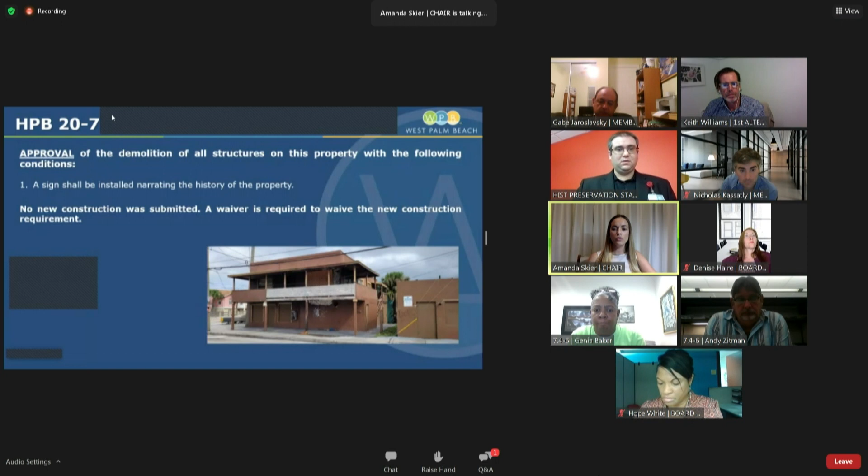Okay, do we have any members of the public that would like to speak on these cases? Yeah, Madam Chair, understanding we do - we have two people here in City Hall that I'll bring up in just a second, and then after that I'll bring on one person online. Just give me one second. Thank you.

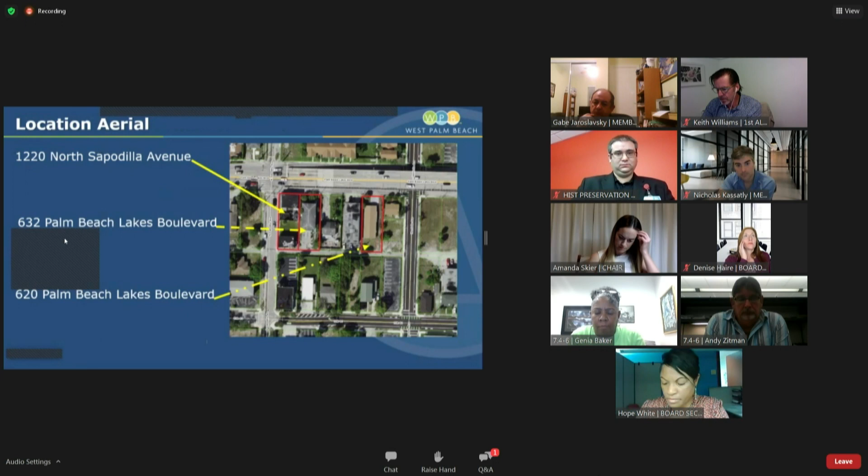Could you exit out? Well, I guess. Yes, thank you, that's better. Now I can see the speaker.

Hello, how are you? Could you raise your hand and state your name for the record after you've been sworn in? Do you solemnly swear or affirm that the testimony you're about to give will be truthful? Yes, I do - John Blauen. Good evening, please proceed with your comment.

Yes, hello. I've been a resident right there, live right down the street, Sapodilla and 13th, for 10 years now. You guys have had at least 10 people die in front of that place. There's a school right next to it, which I can't believe, people just kept getting shot, and the drugs and the crime. The store that used to be there, the only thing they sold was crack pipes, crack screens, alcohol - nobody really went there to buy food. So that building should not be trying to be saved, it's trashed.

Regarding the bridge - when you go under the bridge to walk, it is very dangerous because of the neighborhood. So if you guys are going to be putting a new bridge, which I did hear, hopefully you'll be able to go on top instead of on the bottom. I think it would be a lot safer. Those buildings should not stay there.

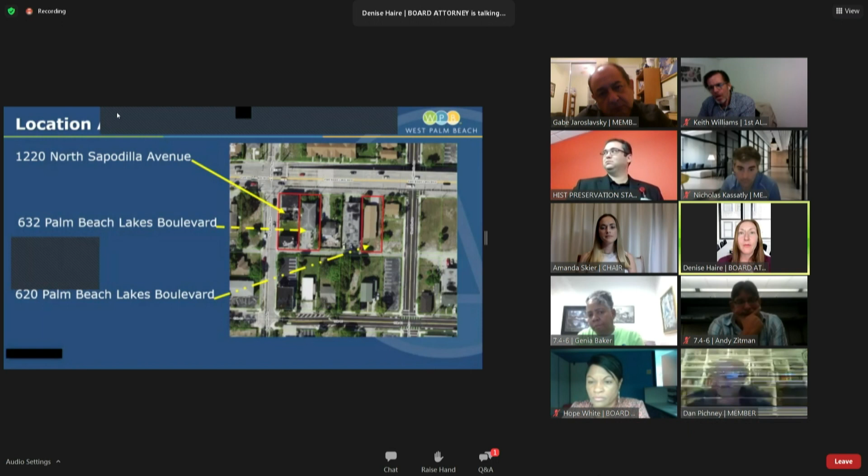Ms. Haire, though, if the clock runs out, it's demolished, correct? After 3 months, if there are no solutions proposed, the demolition is granted, correct? I would assume so, it doesn't state specifically here, but yes, you'd have that certificate issued with the delayed effective date of, for example, 3 months. Then on that 3rd month it would become effective and they could move forward with it, unless during that 3-month period there's some kind of revocation.

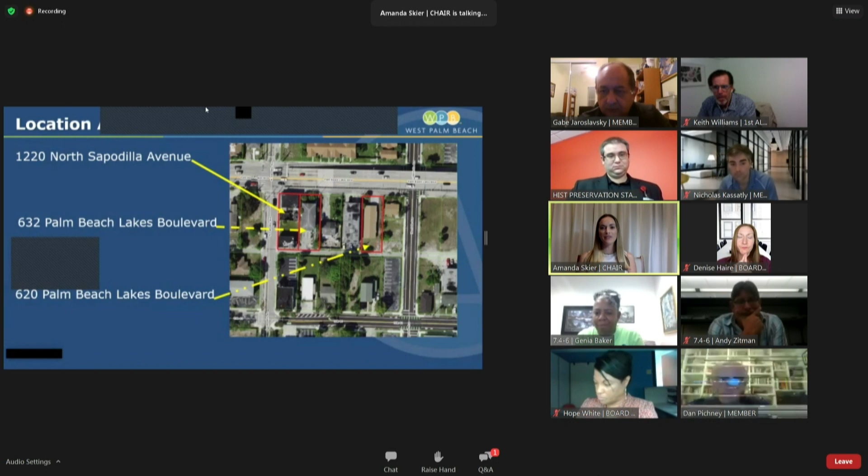Ms. Baker, how would you feel if we continued the case for 1220 North Sapodilla Avenue? This is what I would like to see happen. I can't speak for everyone else, but if we continued the first case for 1220 North Sapodilla Avenue and most likely approved the demolition for the other 2 structures, would that be amenable to you, to give you time to explore an option to relocate the structure within the Northwest Historic District so that it somewhat maintains its historic context? Yes, but if I may, I would prefer not to continue.

I would prefer to have it be a condition of your approval, requiring that we come back to give you our options and suggestions of what we would do with that structure. I'd prefer the board take action tonight so we can have on the record that we are moving forward. I can commit that we will make a good faith effort to look at relocation, if not within the site, then within the district itself, and come back with a presentation of what we found within that 3-month delay, as indicated by the attorney.

Okay, thank you. Mr. Borngraber, did you want to add anything? It looked like you might want to say something. Yes, Gina already mentioned it in passing.

As the overpass will likely expand to the south, it's probably possible for that structure to be relocated to the alley, right next to the alleyway, or at least with some setback per today's codes. So it's still on the same property, that may be possible. That's what I want to investigate. And maybe you can take advantage of that structure and make it part of the new project, nice for the public to enjoy in some way.